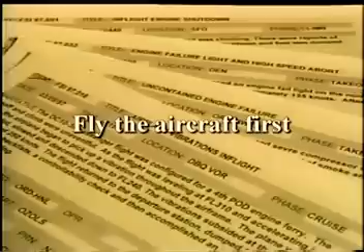Over the last several years, data has indicated some pilots have attempted to diagnose aircraft malfunctions prior to establishing control of the aircraft. This has occurred despite the fact that all pilots are taught to fly the aircraft first. So why does the data indicate that they have not done this? One of the main reasons is the startle factor.

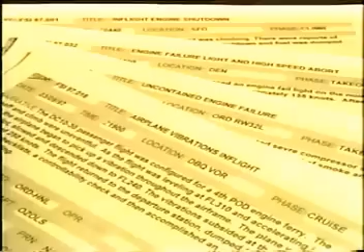Because of modern aircraft's high reliability, when a malfunction occurs, it is frequently the first time the flight crew is exposed to the true sensations of that malfunction. While simulators have greatly improved pilot training, they've not always realistically simulated the actual noise, vibration, and aerodynamic forces certain engine malfunctions cause. It also appears that the greater the physical sensations the pilot feels during the malfunction, the greater the startle factor. And the greater the likelihood the flight crew will try to diagnose the problem immediately instead of flying the aircraft first.

When flight crews are interviewed after engine malfunction events, such as the surge of a large high-bypass engine during initial climb-out, they make very similar comments regarding the event. Pilots will often report that it felt like a bomb went off, or that the aircraft was falling apart. Each time an event occurred, the sound and the feel of the event were different, and often much more intense than indicated by any training the crews had received.

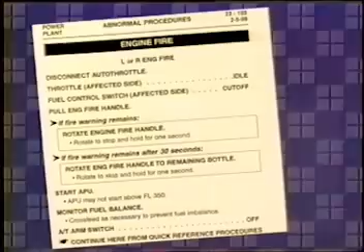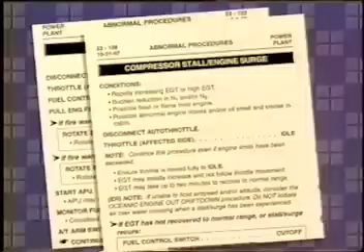Because of this, the flight crew either did not recognize the engine symptom or was so concerned about the engine that they responded without taking time to correctly evaluate the situation. In each case, additional time spent in stabilizing the airplane's flight path before responding to the engine symptom would have avoided a serious event.

Remember, all transport category aircraft are designed and certified to be controllable with the most critical engine failed. Unlike early turboprops, turbofan-powered airplanes do not require immediate pilot action to the engine in the event of a single engine malfunction or failure. Once the flight path is stabilized, the engine malfunction may be safely identified and the appropriate checklists executed. Taking the time to stabilize the flight path may sometimes lead to further engine damage, but despite that, the airplane still has the capability of safe flight.

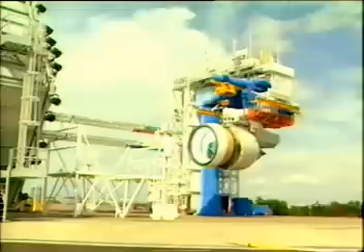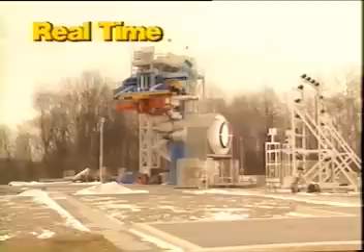Engines are tested during initial certification to demonstrate ruggedness following bird and ice ingestion. Even after a major failure, such as the loss of an entire fan blade, which is an extremely rare event, the engine shuts down safely and the airplane is still airworthy. Service history of fleet aircraft verifies that there are generally no engine failures requiring an instant engine shutdown in order to maintain airplane safety, and that continuing a takeoff after an engine failure at V1 is safer than rejecting the takeoff. So, the capability to recognize turbine engine malfunctions must be learned.

But how? The objective of this video is to provide pilots with information to help them recognize and identify various engine malfunctions that have led to inappropriate crew responses and accidents in the past. These malfunctions include fire warnings, tailpipe fires, bird strikes, vibration, engine surge, severe engine damage, and slow power loss. In each case, the first priority is to employ the basic stick and rudder inputs necessary to maintain aerodynamic control of the aircraft. Remember, fly the airplane and then identify and respond to the engine malfunction when time permits.

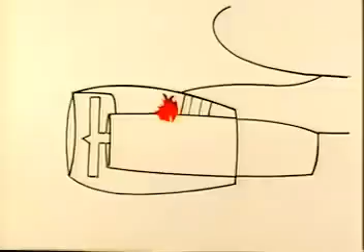Fire warnings result from excessively high temperature in the space between the engine casings and cowling or from fire detection system malfunctions. The heat source may be an actual fire around the engine, an engine failure allowing core air to escape through a hole in the casings, or a leak of hot air from a bleed duct. Whenever a fire warning occurs, the first priority must be to fly the airplane. Once the airplane is stabilized, attention should then be directed toward execution of the appropriate checklist.

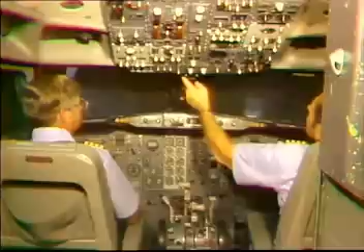Even if there is an actual fire, there is adequate isolation between the airplane structure and the nacelle to ensure sufficient time to establish and maintain airplane control to a safe altitude. Taking this time may cause further fire damage within the nacelle, but accident reports consistently show that flight path control must be focused on first, and it must remain a high priority until landing.

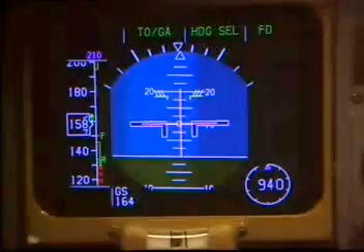Engine torching, or tailpipe fires, mostly occur during an abnormal engine start, but they may also occur after shutdown or during other ground operations. Although there may be no cockpit engine instrument indication, these events can be very spectacular when viewed from the ramp or cabin, and have been confused with an actual engine fire. The torching may be of short duration or it may last for several seconds. Note that the flame is confined to the tailpipe.

Flames may turn upward and threaten the wing if no airflow is maintained through the engine, and in some cases, an EGT increase may be indicated on the flight deck. Simply cutting fuel flow while continuing to motor the engine normally extinguishes the flames. The flight crew depends on ground personnel to identify engine torching.

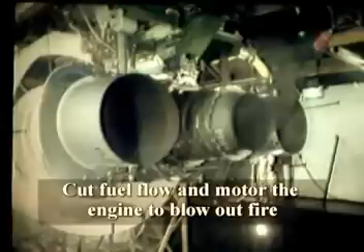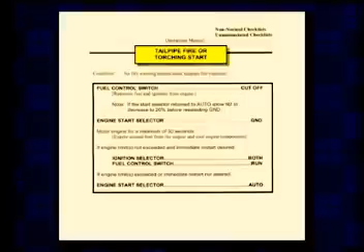If you are told of an engine fire without any flight deck indications of a fire, follow the engine torching procedure as outlined in your flight manual. This procedure will direct you to motor the engine and extinguish the flames. The regular fire procedure will not.

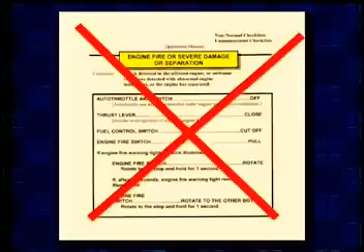Do not perform the engine fire procedure unless a fire warning indication occurs. Executing the regular fire procedure may disable bleed air to the engine starter and prevent you from being able to motor the engine to blow out the tailpipe fire.

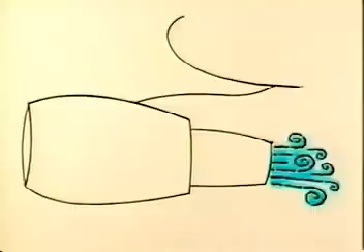There have been cases where flight attendants or passengers have initiated evacuations due to engine torching. These unnecessary evacuations can be minimized by prompt flight deck and cabin crew coordination to provide passengers with pertinent information and to alleviate their concerns.

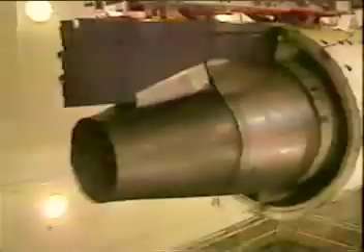Bird strike is a concern for every pilot. The birds may be observed by the flight crew, or the first indication of a bird ingestion may be an engine surge. Flocking birds are a particular concern since they can affect more than one engine. It may be difficult to see the birds and to know how many engines have ingested birds.

V1, rotate, birds. I check the birds. Come on, baby, keep flying. Keep going now. Keep flying. Positive rate. Yeah. Come on, baby, that's it. Nice job. Fly the airplane. There's 400 feet. Okay, what's the problem?

Most bird strikes occur close to the ground, at the very time when there is least opportunity to appraise the situation. Nevertheless, the record shows that establishing flight path control first before taking action on the engine is a more successful strategy than taking immediate action with the engine.

There have been accidents resulting from bird strike-related rejected takeoffs above V1 speed, and in each case, the airplane was in fact safe to fly. Therefore, rejecting a takeoff due to a bird strike at speeds above V1 is not considered to be appropriate.

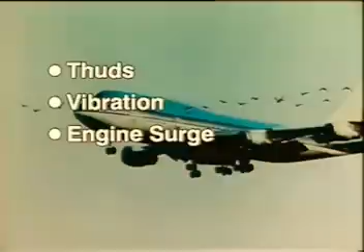Bird strike by an engine may be accompanied by audible thuds, vibration, engine surge, unpleasant odors, and abnormal engine instrument readings such as high EGT. Throttling back an engine may be needed to clear a stall after the airplane has been placed on a stable flight path. If the engine involved cannot be positively identified, do not shut it down.

In the unlikely event of multiple engines surging, prompt action may be required to clear the stall on the engines one at a time to assure that some power is available later. Engine vibration may be caused by a fan unbalance. This can come from ice buildup.

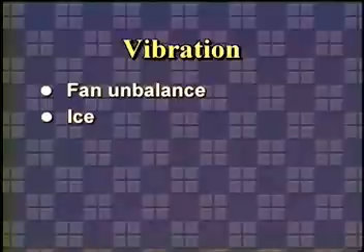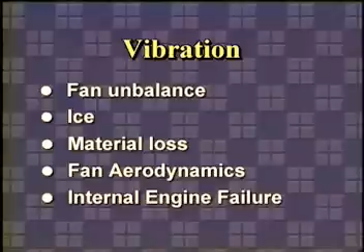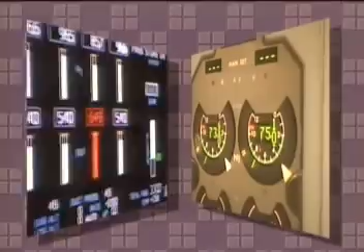It may also come from the fan blade material loss or aerodynamic excitation from blade distortion due to foreign object damage. Vibration can also come from internal engine failure such as a bearing failure. Cross-reference of all engine parameters will help to establish whether an engine failure actually exists. Engine-induced vibration felt on the flight deck may not be indicated on instruments.

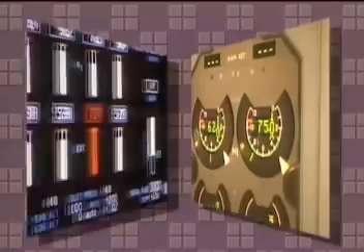For some engine failures, severe vibration may be experienced after the engine has been shut down to the point where instruments are difficult to read. This vibration is caused by the unbalanced fan, windmilling at an engine speed close to an airframe's natural frequency, which amplifies the vibration.

Changing airspeed and/or altitude will change the fan windmill speed, and an airplane speed may be found where there will be much less vibration. There is no risk of an airplane structural failure due to vibratory engine loads during this windmilling action.

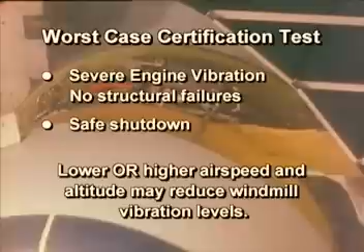From a flight crew member's perspective, one of the most startling events is the engine surge or stall on takeoff or during flight. An engine surge is, in the simplest terms, the breakdown of the airflow in a turbine engine. When the compressor blades stall, they are no longer able to force the air through the engine from front to rear. Now the high-pressure air in the middle of the engine can escape explosively from front and back simultaneously.

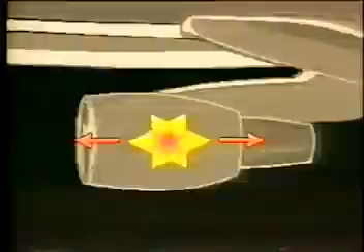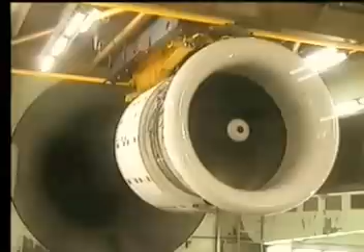Usually there are visible flames from both ends of the engine, accompanied with one or more very loud bangs. This violent airflow reversal will produce an instant loss of thrust and an immediate yaw that will literally spill most of the coffee from your cup. This yaw is accompanied by a vibration that cannot be duplicated in the simulator.

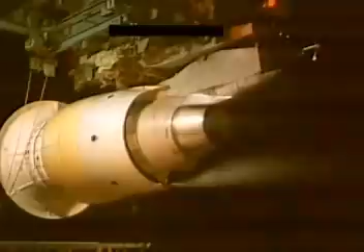Bird strikes, internal engine failures, engine pneumatic bleed malfunctions, or internal engine clearance changes can cause a surge. It is usually a problem in the compressor system and so is often referred to as a compressor surge or compressor stall. The magnitude of the symptoms, such as the loudness of the noise and the severity of the vibration, vary with the power setting and the type of instability in the compression system. Low altitude and high power settings produce the loudest bangs and the most violent yaw and vibration.

High altitude surges are frequently associated with engine power changes during leveling off or when initiating an altitude change. High altitude surges generally result in a muffled noise, light vibration, and increasing EGT, and may require power reduction to clear the condition. Some surges allow the engine to recover with no flight crew action. Others recover after flight crew action to reduce power. The most severe surges are non-recoverable. When the engine recovers by itself, it is best to just fly the airplane and not interfere with the engine.

Identification of a recoverable compressor surge or stall condition based on engine parameter fluctuations or changes alone can be difficult, due in part to the fact that the event is usually over in the blink of an eye. Generally, most flight crews identify the condition as an engine malfunction when the EGT exceeds its limits or the EGT gauge turns red. If EGT continues to rise following a surge, the thrust lever should be retarded to allow the engine to recover. Then, after the engine recovers, power should be reapplied slowly.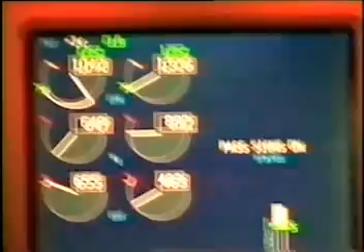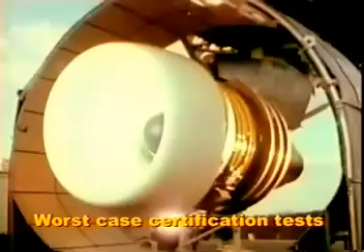In the event of a major internal engine failure resulting in severe engine damage, there may be a variety of symptoms on the flight deck: fire warnings, engine surge, vibration, high EGT, fluctuating RPM, oil system parameters out of limits, and thrust loss.

Any one of these symptoms alone could be from a more benign malfunction, but multiple symptoms are a good indication of severe engine damage, and visual inspection by the cabin crew can be very helpful in confirming this. Visual symptoms may include flames, smoke, or visual damage to engine cowlings.

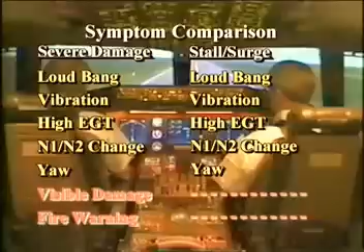It may not be possible to distinguish initially between an engine surge without damage and one accompanying severe damage. The symptoms of the two kinds of events can be very similar, and from an operational standpoint, it is not important to know immediately which of the two has occurred. If it does become necessary to shut down the engine, wait until you positively identify the engine you select as actually being the malfunctioning engine.

It should be noted that even an engine which may show signs of visible damage and visible flames may very well be producing useful power necessary for initial climb out. Again, the first priority is to fly the airplane, not the engine. After you have positive control of the aircraft's flight path, then identify and secure the affected engine when time permits. Diagnosis of exactly what caused the engine problem is neither necessary nor safe if it diverts resources from flying the airplane.

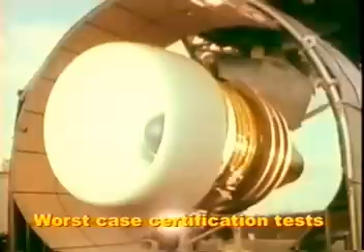The malfunctions discussed so far have compelling cues, such as loud bangs, vibration, and warning or advisory messages. In each case, the challenge is to fly the airplane without being distracted by very compelling or alarming engine symptoms. The last type of malfunction to be discussed here is more subtle: slow decay of thrust, or non-response to power lever. These can be subtle in fact to the point that it can be completely overlooked, with potentially serious consequences to the airplane.

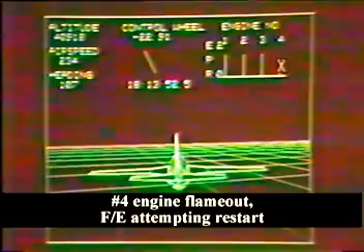If an engine slowly reduces power, or when the thrust lever is moved the engine does not respond, then the airplane will experience asymmetric thrust. The problems will most likely develop at a point during the flight when the autopilot is engaged. The autopilot will compensate for the asymmetrical thrust on its own. It takes an alert flight crew to recognize the situation that's developing.

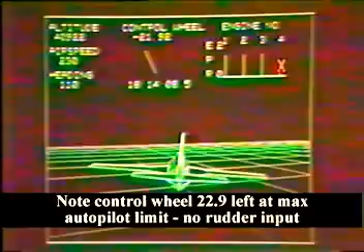If the airplane is badly mistrimmed when the autopilot is manually disconnected, or when the autopilot reaches the limits of its authority and automatically disconnects, only seconds remain before an unusual attitude is encountered. If no external visual references are available, such as flying over the water at night or in IMC, the likelihood of an upset increases. This condition of low-power engine loss with the autopilot on has caused several aircraft upsets, which were not always recoverable.

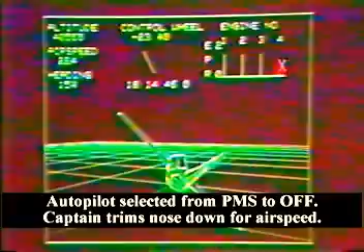Flight control displacement or trim input indicators may be the only obvious indication that the autopilot is trimming the aircraft away from the coordinated flight. Vigilance is required to detect these stealthy engine malfunctions and to maintain a safe flight attitude while the situation is still recoverable. But a slowly changing asymmetric thrust problem is not an easy one to detect.

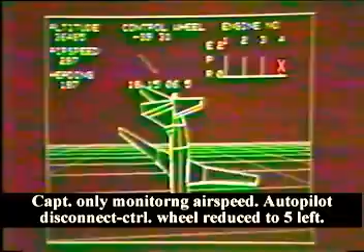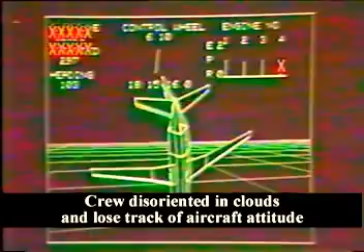Symptoms may include multiple system problems such as generators dropping offline, low engine oil pressure, unexplained airplane attitude changes, and significant differences between primary parameters from one engine to the next. If asymmetric thrust is suspected, the pilot must be prepared to make immediate rudder or trim inputs to avoid an uncommanded aircraft roll. The first response must be to make the appropriate rudder input or trim adjustment. Disconnecting the autopilot without appropriate control input or trim adjustments may result in a rapid roll maneuver.

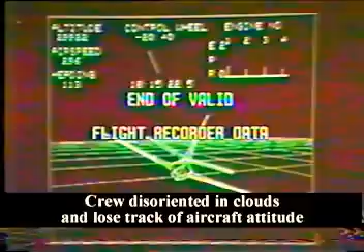Different aircraft from different airframe manufacturers display different types of indicators to the pilot regarding the amount of trim the autopilot may be adding to the system. Consult your flight manual and training department to gain a full understanding of how your particular aircraft provides visual, audible, or tactile indications of the amount of trim being added by the autopilot.

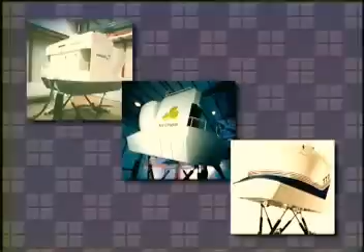The sequence of events and severity of symptoms experienced during an engine malfunction may vary from the events shown in this video and from those experienced in a simulator. Engine malfunctions vary from one event to the next. The failures shown here were selected as relatively severe, but not the most severe that have ever occurred. Simulation of failures may be limited by simulator capability, which may not permit realistic levels of noise and vibration symptoms. Industry is currently addressing these concerns to enhance the simulation realism for such failures.

This video is intended to provide general information on the characteristics of some high bypass engine failures and malfunctions. It is not intended to be an in-depth study of all possible engine failure modes. Specific remedial action to be taken in the event of an engine failure is published in the Airplane Flight or Operating Manual.